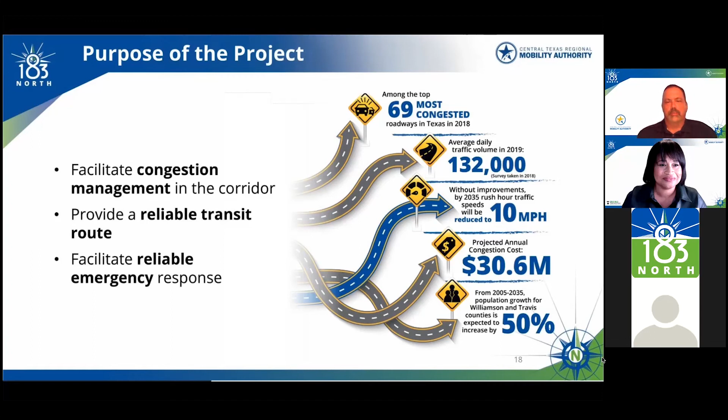The construction team at Great Hills Constructors will outline the details of the project here in a minute and be able to answer your questions about how that construction will move forward. We're looking forward to kicking off this project in early 2022, and we have a strong team in place to ensure the project's success. With that, I'll pass it back to Sharonda.

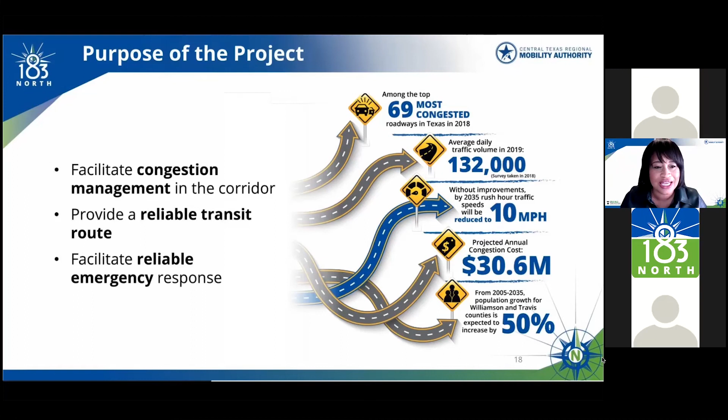Thank you so much, Mike, I appreciate that overview. There are a lot of really talented folks working on this project, and I'm grateful to have the opportunity to work alongside them. As I mentioned earlier, we wanted to hear a little bit more about who has joined us, and we've got about 66, almost 70 participants here tonight.

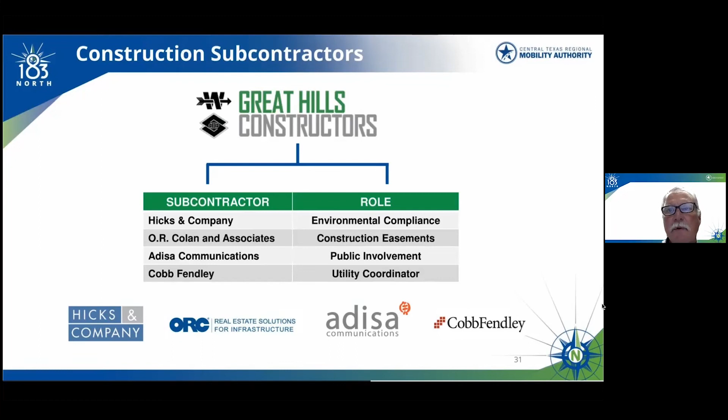Then the next group of folks, under the oversight of our GHC team, the construction team sub-consultants includes Hicks and Company for environmental compliance, O.R. Colan and Associates for construction easements, Adisa Communications for public involvement, who we're obviously familiar with by now in the presentation. And then we have Cobb Fendley, who's also doing the utility coordination on the project.

Our DBE participation goals are really important for the project. It's important for this project to utilize subcontractors with disadvantaged business enterprise, or DBE, certifications. Currently 10% of our design subcontractors and 9% of our construction subcontractors are DBE certified.

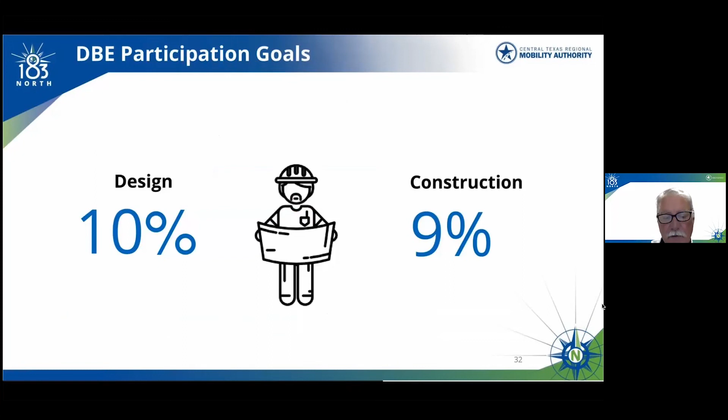All right, so project overview. Next, we're going to give you an overview of the important project highlights and additional information.

So this is the project video, and Pat is going to walk us through a little bit of before and after of a couple of the intersections for the project, so people can get a sense of what the project will look like once it's completed. All right, so are we ready to roll the video? We are ready. All right, perfect.

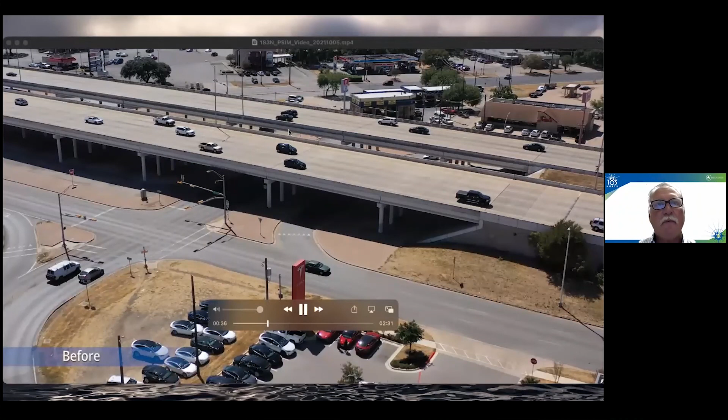As I mentioned earlier, this project limits cover approximately 9 miles along the US 183 corridor. The first intersection we're going to highlight for the audience is the northbound side of 183 there at Pond Springs Road. If you're familiar with the area, you'll see the Tesla dealership down below in the picture there. This is before, what it currently looks like. And then after, you can see the pedestrian improvements and the shared use path that goes underneath this bridge area. You can see a great improvement right there through this area for pedestrians, bicycles.

We're going to take another look at it, zooming down in closer to the intersection. You're seeing the current project in its state now. Again, before, where we are today. And then after, you're seeing a lot of good access there for pedestrians and bicyclists. And then also you can see the shared use path underneath the bridge as well. It will be a great improvement.

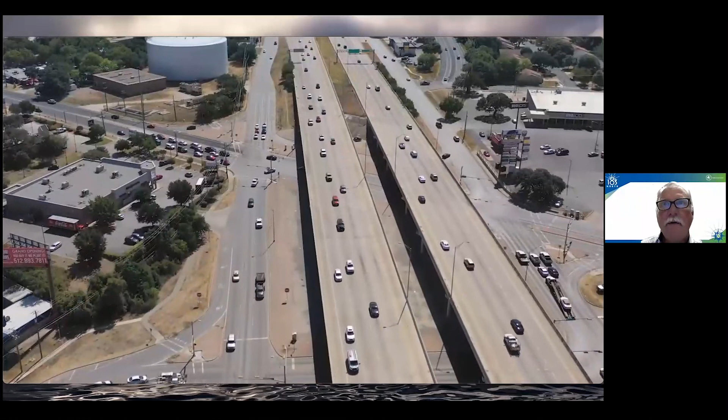All right, so next we're gonna fly south along the 183 corridor, and we're gonna stop at the Duval Road intersection. Many of you in the audience are familiar with Duval, a very busy intersection as well.

Everybody probably recognizes the signature curve there on the 183 alignment. Now we're coming down to Duval itself, going down to take a closer look at the intersection and its current state.

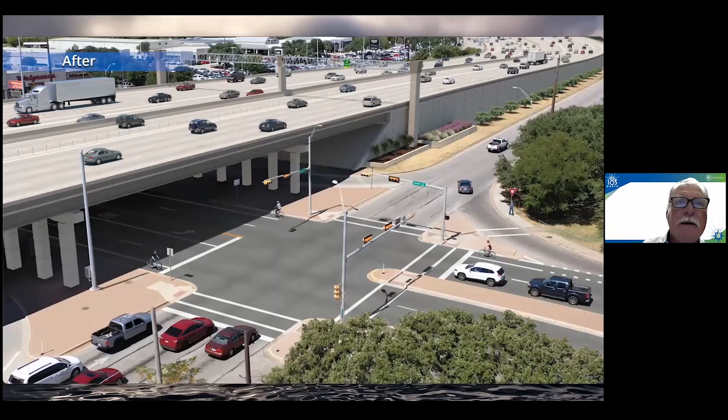Now you can see the nice improvements we see here. Again, very improved pedestrian and bicycle access, dedicated bicycle lanes, and a nice clean intersection in this area. That's our overview of a couple of highlights of intersections where you'll see some improvements in the future.

All right, now we're going to go to project highlights. So some additional improvements I want to key on.

We're going to be adding a collector distributor to the southbound Mopac Frontage Road. This is going to allow southbound traffic on 183 to efficiently access the Mopac southbound Frontage Road from 183. Currently, it's a little difficult to maneuver through there. This will make that much more efficient.

The next thing will be installation of high-tech traffic monitoring systems for improved traffic management and emergency response, as well as construction that will provide direct connection for Mopac via the new express lanes on 183. Next slide, please.

One thing I'd like to touch on real quick is the term collector distributor. Not everyone may be familiar with that term, but that's basically a flyover bridge that has direct access from 183 down to the southbound Frontage Road on Mopac. So that's essentially a dedicated bridge for that traffic, keeping it out of some of the other traffic, making it much more efficient.

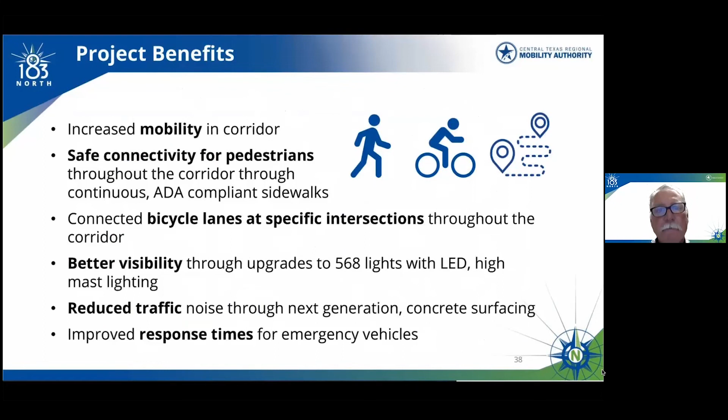Okay, thank you. Next slide. And Pat, can I jump in real quick? Because I want to make sure that Nancy, who asked the question, Nancy Elder, what is a collector distributor? That we actually answered her question to her satisfaction. And Kath Polito, we see your question. We're going to get to Q&A in just a few moments. All right, Nancy says yes. So Pat, keep going, let's talk about the project schedule. I know folks want to hear about that. Yeah, good deal, I'm glad that my response was understood. So thank you for letting me know that.

Good, all right, well, let's go to the project schedule. So currently in 2021, which is of course where we are now, we are in the design phase of the project, as well as the work planning, and our subcontracting and procurement process. We started the process back in essentially the March, April timeframe. Since then, our project team is assembled, our design team is assembled, our CTRMA team is assembled, and so we're working daily with all the folks on the team to do the design and coordination of the project currently.

So that's going to take us into next year, and we're getting very close to next year already. There's not much time left in this year. So next year we will complete the design for the project, and then we'll start construction next year. We anticipate starting construction the first quarter or so of next year.

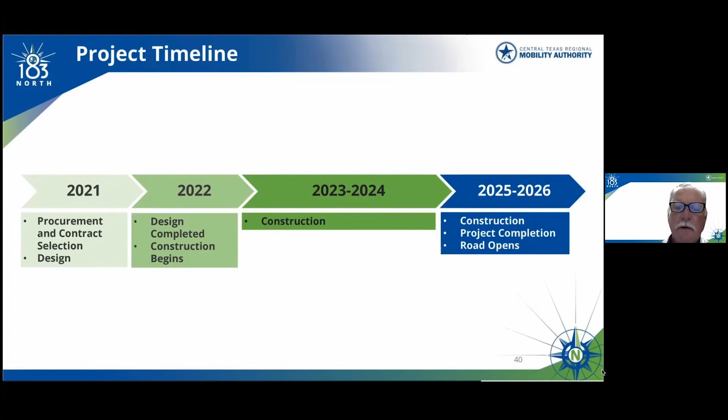This is where we're going to start on the 183 main lanes. We'll talk about Mopac in a minute, but for now, we're working in the center median, filling it in and paving where there's currently grass. All the intersection bridges will be widened to the inside, closing up the inside with new bridge work. That will give us a travel route all the way down the center of the project.

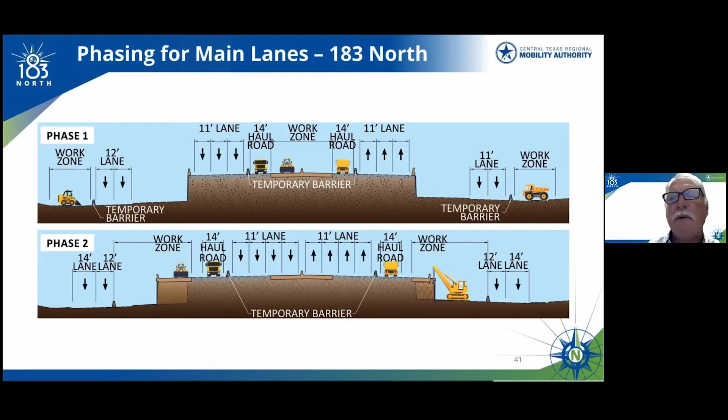If we go to the next slide, we'll talk about the Mopac Corridor. In phase one here, it's essentially the reverse of what we're doing on 183. We're going to start on the outside this time on Mopac, doing our widening to the outside of the project.

What this does, by doing that widening up front, is get us to phase two, which means we switch traffic to that widening, pushing traffic to the outside. As many of you are familiar, where the current express lanes are, we have to make room for the new direct connect structure bridges where they're going to touch down, in the center, as illustrated in the phase two drawing. That's essentially the work happening on Mopac.

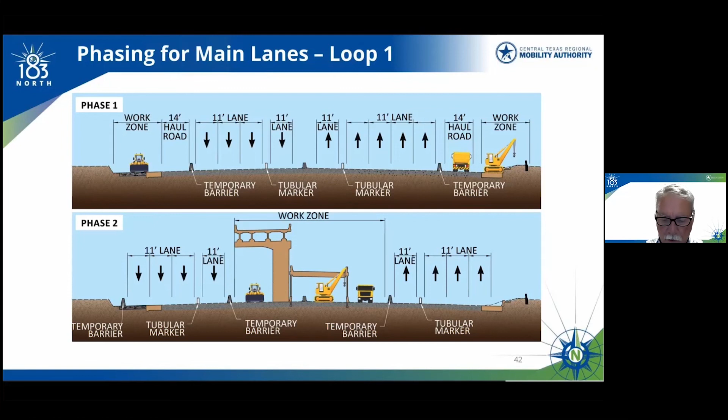All right, so hopefully those graphics were helpful in explaining the process of our work. Thank you again very much. I'm going to turn it back over to Sharonda.

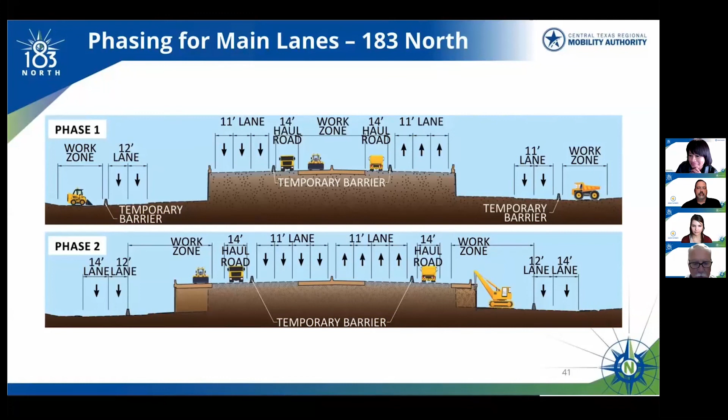So Pat, can you answer the question about traffic safety, and then we can go to the configuration of the roadway? Well, traffic safety, or safety to the traveling public, is one of the most important jobs we have out here. We take that very seriously. Our work planning always needs to take, and will take, that into account as we work on the project, as we have to get our equipment in, our men in, our materials and supplies in.

That's a very top priority to us and our team, very important, in other words. We'll always take that into account as we do any work out there on the project. The CTRMA also considers that a very, very high priority, so they will be monitoring and making sure that the processes we're doing are safe for everyone. That's one of our main jobs out here. Hopefully that answers that question.

Going back to the number of lanes, this cross section doesn't really give us the final look, but I can talk through that.

Going back to the cross section view, looking at the bottom one on 183, there'll be 4 general purpose lanes, and that 4th general purpose lane comes from the outside widening you see on the right and left hand side. There's a crane down there on the right hand side of the screen building that 4th general purpose lane. Same thing on the left side - that's where the 4 general purpose lanes are.

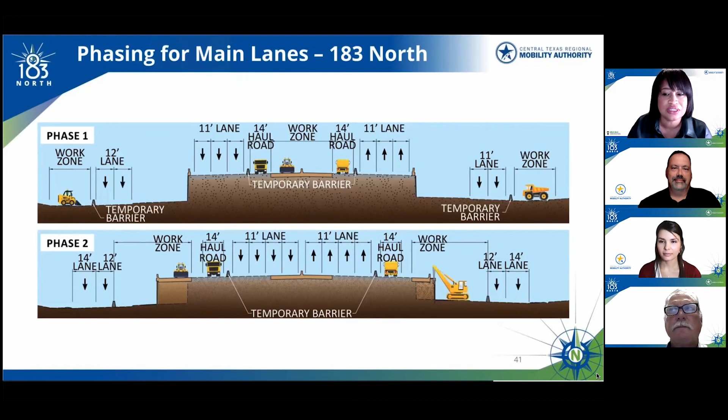It does, and thank you for clarifying that. You can go ahead and take down this graphic. Thank you for pulling it up for us.

Got a question - we know we've got a lot of businesses along this corridor, and I'm sure there are business owners really anxious to know how this project is going to impact them. We've got a question from Ashlyn Hutton, who wants to know, will the phasing allow for access to businesses off of the frontage road? It absolutely will. We will not be blocking anybody's access to their business.

I think it's well north of 180 driveways on this project, which is quite a large number, and it takes its own detail or attention to detail, if you will, because there's so many driveways. So as we work up and down the corridor, our team, along with Adiz's help and the CTRMA's staff, will be contacting these property owners ahead of time before we start work there, notify them of the schedule of when we would like to begin work, and coordinate with each one to make sure they have continual driveway access. In some cases, property owners have a couple of driveways - that makes it easier because we can build one, leave the other open, and then flop that over and do the same on the other one. In some cases there's just one driveway, so we'll have to do that over the weekend when hopefully no one's there.